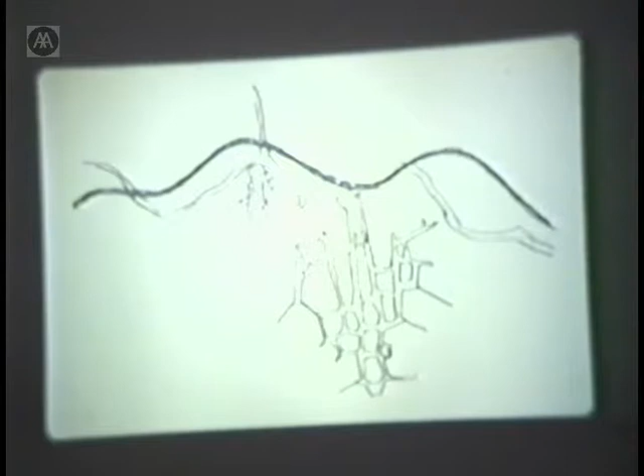The concept, one of a network in which the vehicular system was given a different geometry to the pedestrian system. There were three components: traffic system, pedestrian traffic net, pedestrian net, and the green space. They were locked together in a form of what we then called contra-geometries. That is, one geometry playing against another. And as you can see, the project envisaged a real regeneration of Berlin as the capital of Europe and the crossing point between East and West.

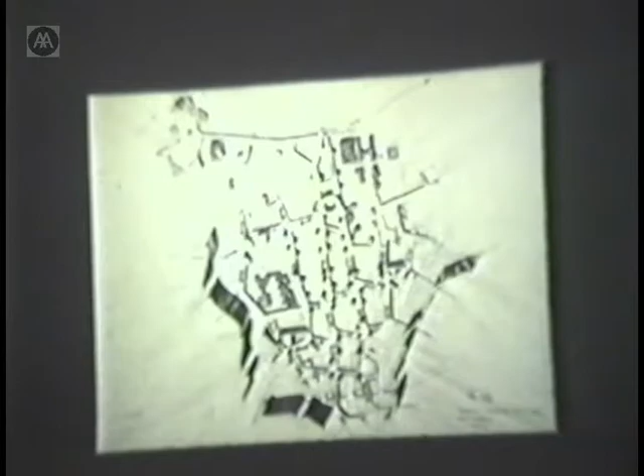The next period, the 60s, we had to face that the unification of Berlin was unlikely, and that we had to deal with half of a city, a half where the frontier made a shape for the western portion like the look of your hand, with the Mehringplatz at about this point. When the city was divided... can I walk about? No, I'll walk about, I'll leave the microphone.

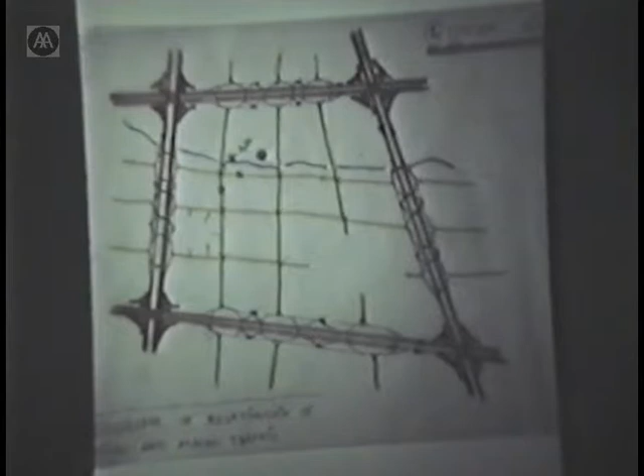The deepest, the longest thought-of project for the Berlin Hauptstadt was that of Hans Scharoun. And in his Hauptstadt, the grain of the city went from east to west. Once you accepted that a north-south axis was impossible because of the border running across it, the grain running with the Tiergarten seemed to be the obvious fabric for the city.

Therefore, the 60s, in accepting the splitting of the city as a permanent thing, with the permanent handling of an ever-increasing traffic load, our second project for the Mehringplatz looked back at Scharoun's Hauptstadt. Scharoun's Hauptstadt accepted the green-centered city and realized the horizontal east-to-west structuring potential of the Tiergarten.

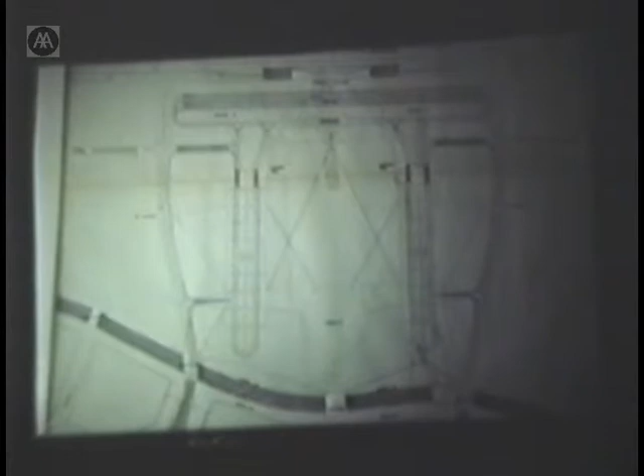Therefore, at the time of the Mehringplatz project, we accepted an idea of a linear system with things pendant on it. One of the things that was pendant on it was the development at the Mehringplatz. That is, it was no longer the end of an axis, but something hanging off a series of horizontal strings, one of a series of things hanging. So the distribution is at the top, the grain is running east-west.

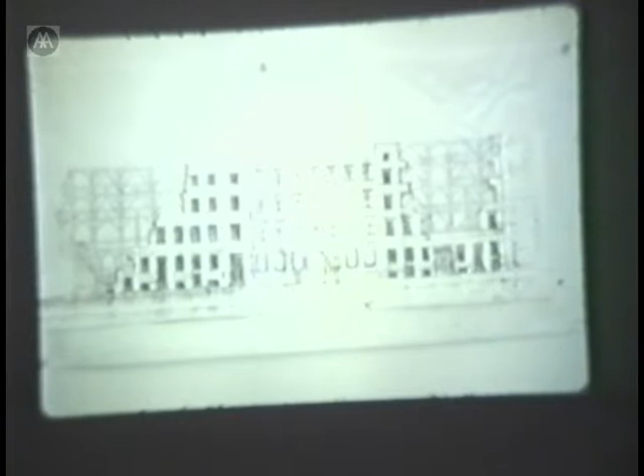In the 70s, the attitude that was generally accepted was to consolidate the existing fabric. Our studies in that decade were trying to make the existing half city more adherent.

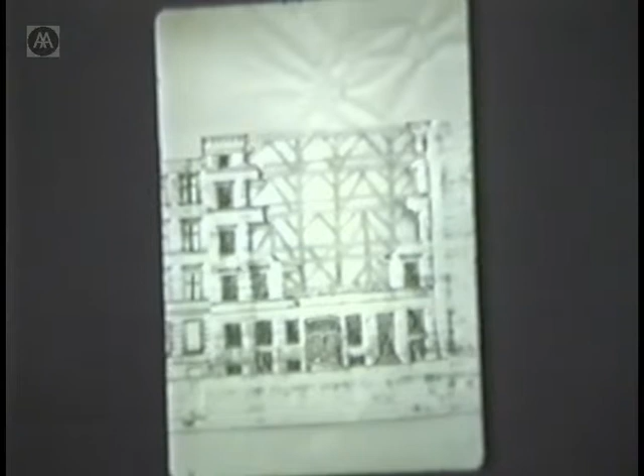In the Kreuzberg project, the keeping of the integrity of the city block and quietening the space behind it. Two projects for Kreuzberg, in '76 - can I have that off?

Well, that was '75. '76, another infill project on the Landwehr Canal. '77, a bridge over the Verbindungs Canal.

And in '80, with the collapse of the Congress Hall - how do I make it go again?

With the collapse of the Congress Hall, a series of projects organized by the Aedes Gallery for a monument to the collapse of a building. And we made a tree for the Berliner Bear to live in.

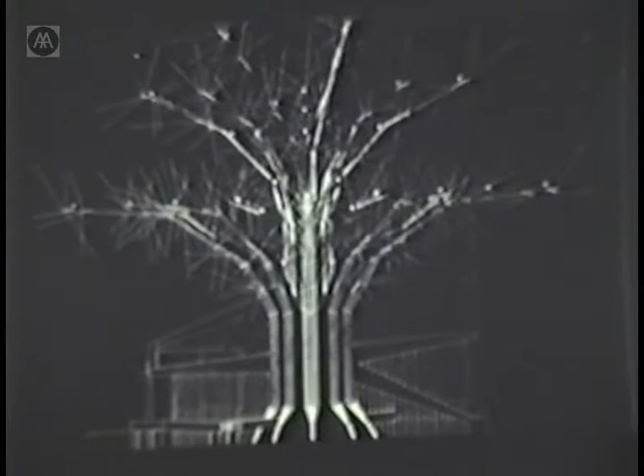Now at this point we begin to pick up connections with AA people. That drawing was made by Ira Fagan, who was an AA graduate.

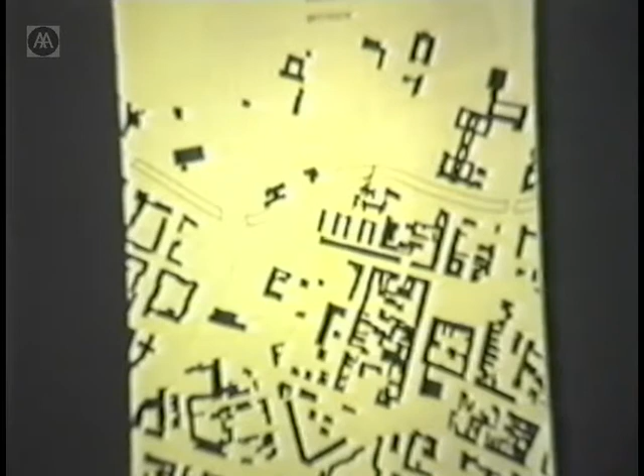In 1980 was the beginning of the IBA period, and we made a competition on the Lützowstrasse, still pursuing the idea of adherency within the conglomerate of the half of the city.

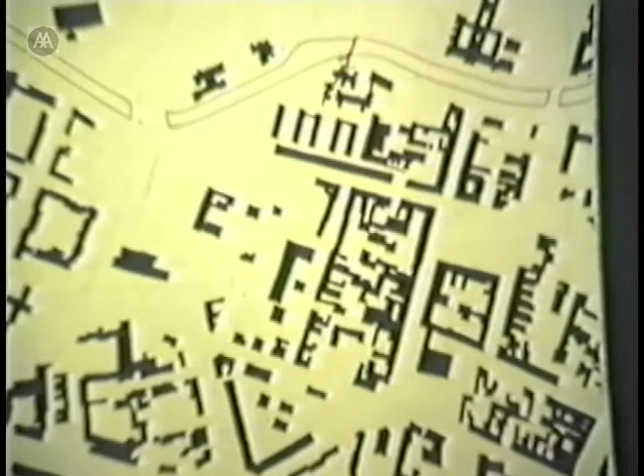But something completely new was entering, and I would have thought this was no longer a period of infill, but had already moved into the period where the green, the new contract with nature, began to fight through into an aesthetic.

So this project is one which responds to the climate, to a sun-accepting south face, an energy-conservant north face.

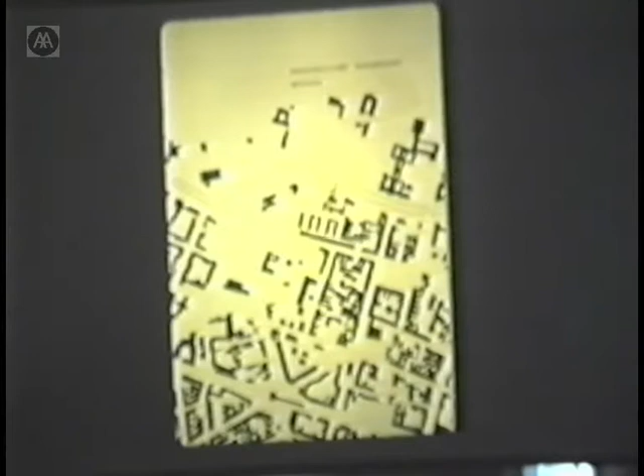It took as its model the summer tram of Berlin, where after Easter passed, the tram cars became white with white awnings, white curtains. And we wanted to make a building that when the summer came, it would change like the trams once changed.

So this picture captures, I think, the change in one's sensibility. We now wish to cohere with the periods of the year, the cycle of the year.

So that we've made a project in which it was obvious where the sun would come in and where the sun would be kept out, the north and the south. And this is the bit that's supposed to look like the tram car.

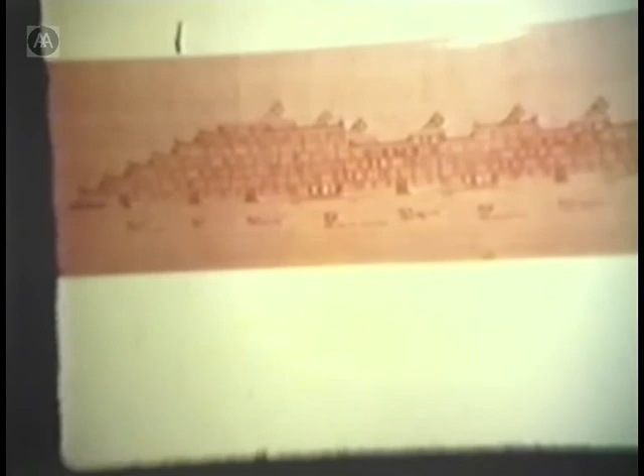It's more like a train picking up power at the top of the tram car. And with a plan which changes its density from the north side to the south side.

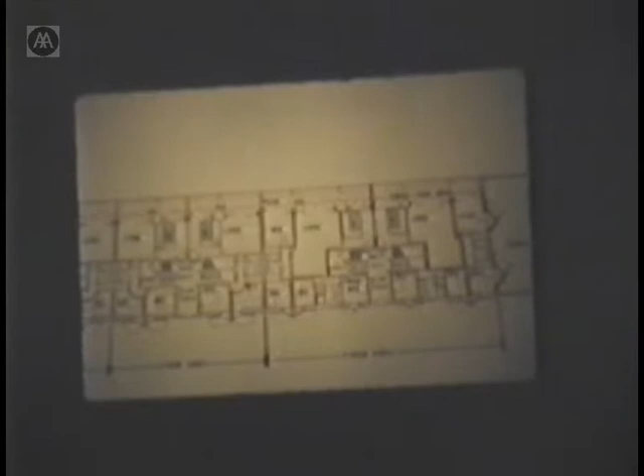And I can see that this, the organization of the plan to respond to aspect, is going to occupy the next 15 years. And you can see the thought that was given to the way it behaved in relation to its situation.

The same components from the main building are used in the subsidiary building. This is a youth club. And from the youth club, you can jump over the canal into the greener parts of the city. The building was used as a wall.

The wall built a territory. In the territory you had the garden buildings. I mean, it's a continuous theme.

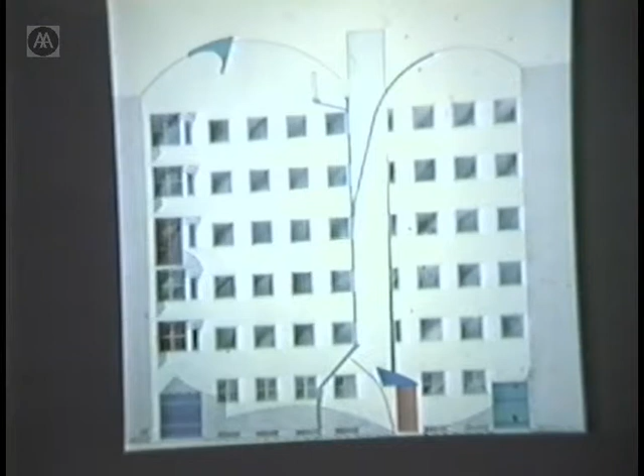And it so conveniently happened that this face, of what is basically a small piece of a side of a block, we are willy-nilly forced into sustaining this mythical block. I seem to remember seeing photographs of the old Lützowplatz, but actually it wasn't as totally integrated a block as it will be when it's been rebuilt—it was much more like Notting Hill Gate.

It was much more a piece of bourgeois Arcadia, with a lot of trees and lots of slightly funky corners. So it's not a question of replacing what is there, it's replacing again the mythology of Berlin, the city of completed blocks. But I digress slightly.

This is the east-facing side of our little building, sandwiched between others. Even in Berlin the sun rises in the east, and one wakes up and has one's bedroom, so it's reasonable to have the bedrooms and bathrooms facing the eastern, quieter side, while the living space picks up the sun as it turns round to the west and southwest.

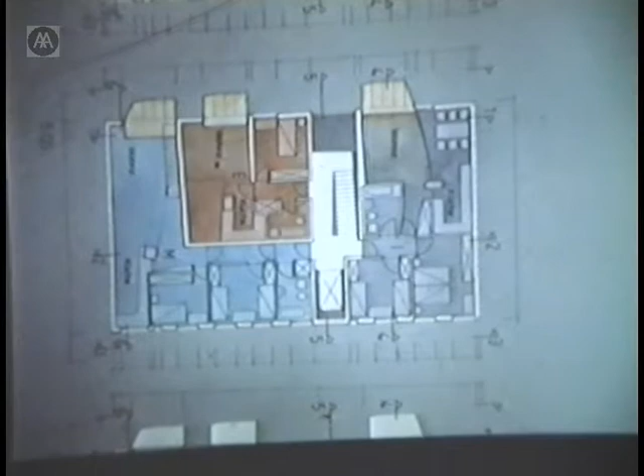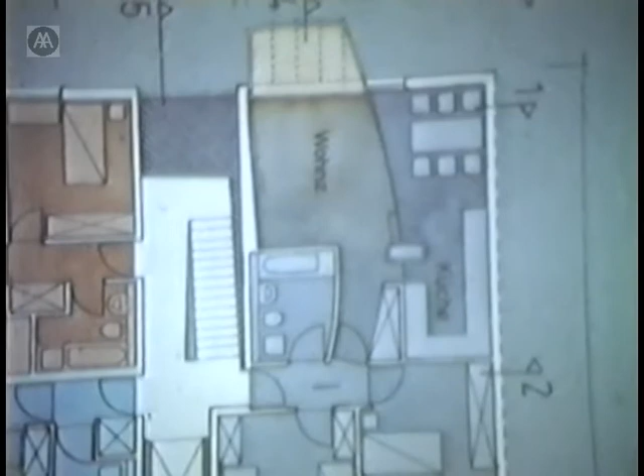We're told there is, or has been, a competition for the reconstitution of the Lützowplatz, a sort of town square, and for reducing the main traffic that currently runs past it. We can only hope for this, so we intend the living spaces to automatically be on the west side, the green side, the sunny side, facing out over the park.

And so it is reasonable to have two different kinds of skin following that orientation.

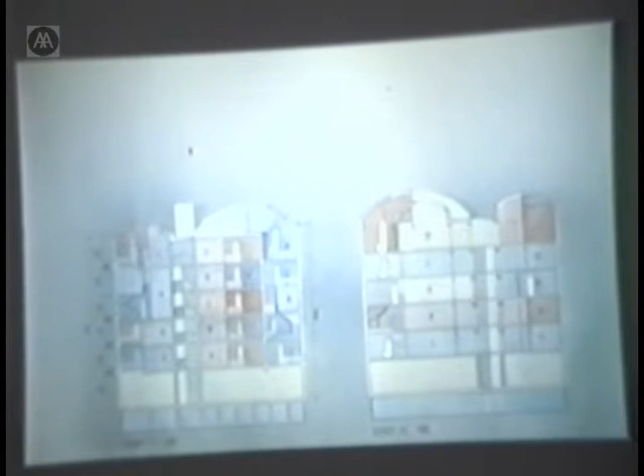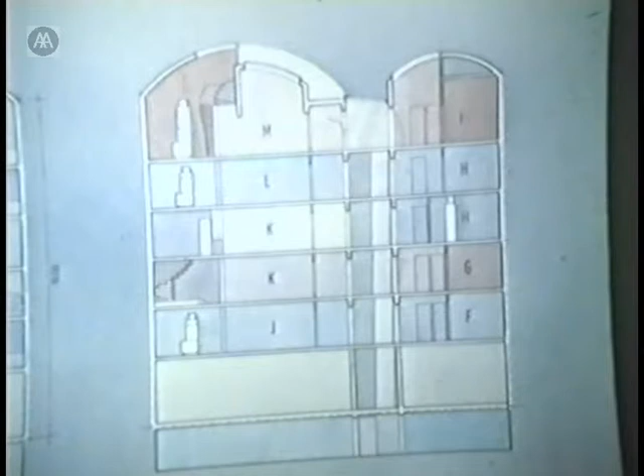I think the other thing I should mention is that both Christine and I have worked in offices building housing to the famous Parker Morris standards. I've noticed that compared with some of our neighbours, coming from this sort of penny-pinching English Parker Morris background, we're used to conversations like 'you'll have to move the partition two inches because that'll save so much money,' and 'the pram goes under the staircase' — all that sort of thing one sneers at on one hand, but is rather familiar with on the other.

And essentially coming from this tradition, we basically designed the building from the inside to the outside. We didn't make any drawings of either facade until we had got pretty near to the end of the design of the dwelling units.

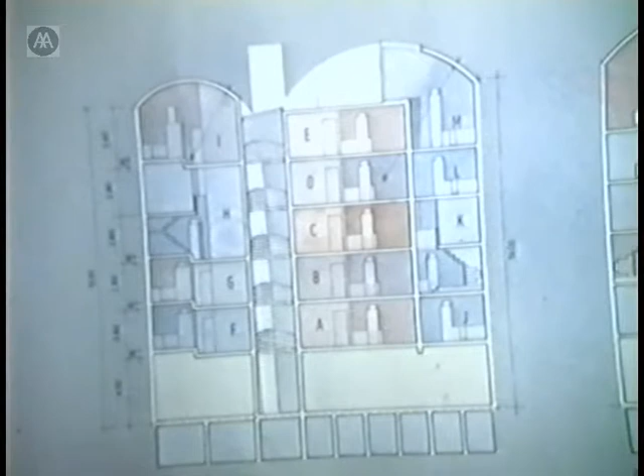We drew most of the many early arrangements of the building in section before we started really pinpointing the plans. I think that essentially comes from a tradition — perhaps you might say a 60s tradition, though Christine would contest that description — but it comes from a spatial and knitting design position, rather than, as we notice in many IBA housing pieces, where you perfect the facade and then stick some rooms behind it, so the reiteration of the facade becomes the primary thing.

I'm showing here a rather early version of the same project, before our hands were slapped and we were told not to do so many maisonettes, because we were really thinking about bringing light into the center of the building, knitting, giving some relief to the boxy quality that so much local authority housing has. We've even had boring discussions and battles over how many centimeters of height we can buy.

It's the problem of small flats — as a child I lived in a lot of small boxy flats, and I know how tedious they can be. So the planning was essentially three-dimensional, from the inside out, trying to get as many diagonal glimpses, as many beams of sun, and as many spooky corners as you could, without making every apartment different — trying to be rational by bringing load-bearing conditions down where needed without the whole thing jiggling around, making the technically more complex parts applied to the basic structure rather than carved out of it. We have, I think, 8 types of apartment in a block that only has 13 units anyway.

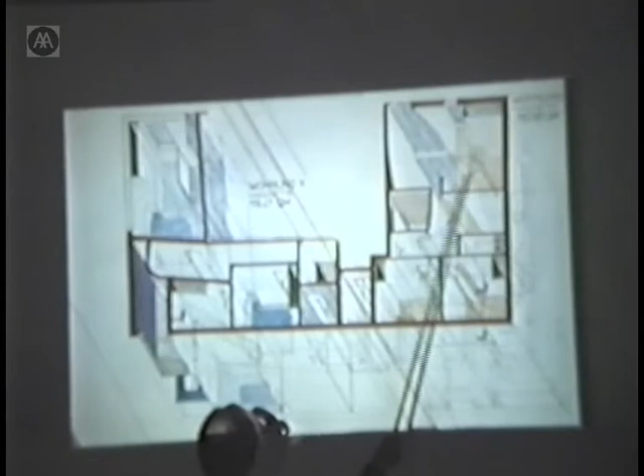A typical apartment is this one on the right, where you can see in this case a double-height space, an internal bathroom, and the bedroom onto the quiet back court.

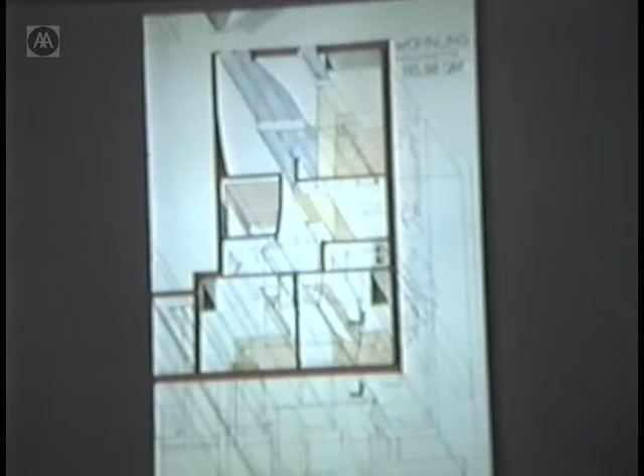You will notice the beginning of some internal pieces of architecture, which are the towers. These are very important and really stem from conversations that started with this thing made in Milan called His and Hers, something between the scale of a piece of furniture and the scale of a room—a notion started as a tradition by the Smithsons themselves, in projects such as the Appliance House, the House of the Future, and the notion that the appliance generates an internal architecture of pieces which take on their own continuity with the space.

You don't just make the box of the room and hope the furniture that comes in is all right, nor do you necessarily just fit up kitchens and bay windows and hope the rest of the interpretation is all right. What you do, if you can get away with it, is scatter the space with certain nodal elements.

I'll come back to that again. As we turn to the park facade, one sees this common space of the family, the double height spaces where they do exist, and the living room spaces bursting out and grinning at you by way of the winter gardens.

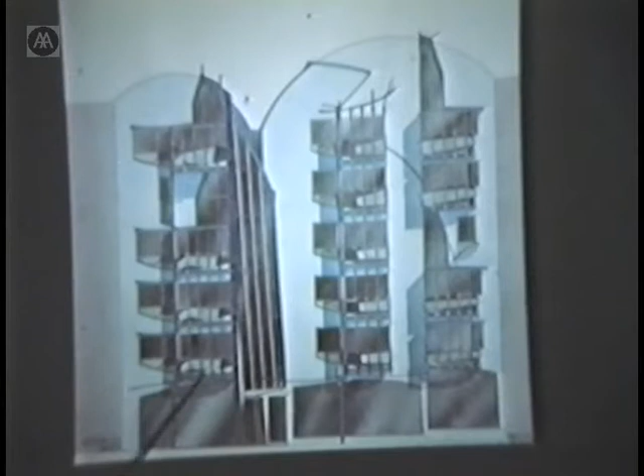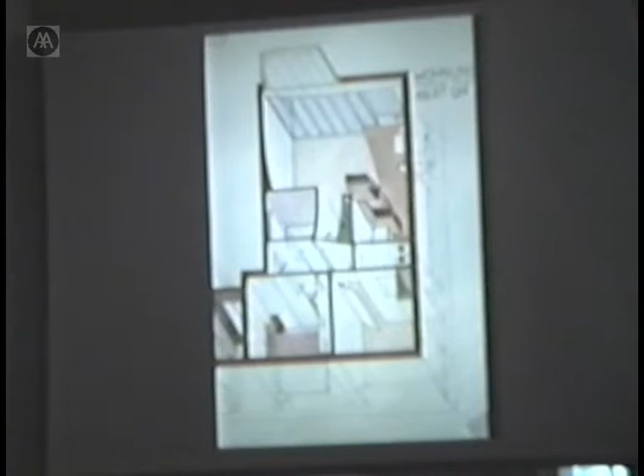These internal appliances then start to congregate around the kitchen area, and this is very much part of Christine's interest in kitchens and cooking and the development of kitchens—you have a kind of node point for the kitchen, but you don't have these tedious strips of cupboards that you hope the food activity will sort of infiltrate the space.

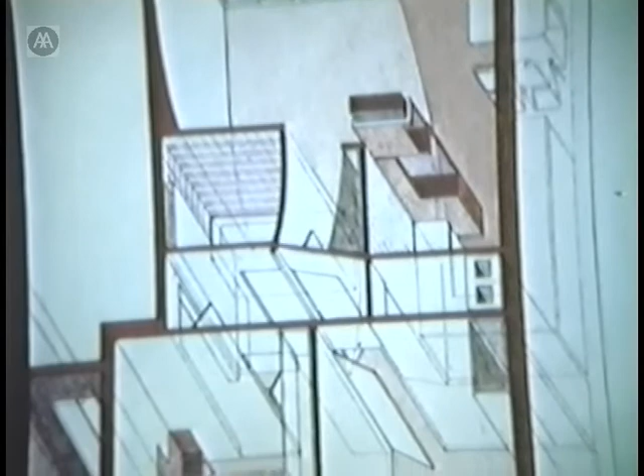Difficult to do with these tight floor-to-ceiling heights. So we then start playing other tricks by deliberately stepping the concrete slab floor by floor, just so one gets the impression of greater height without actually using any more volume.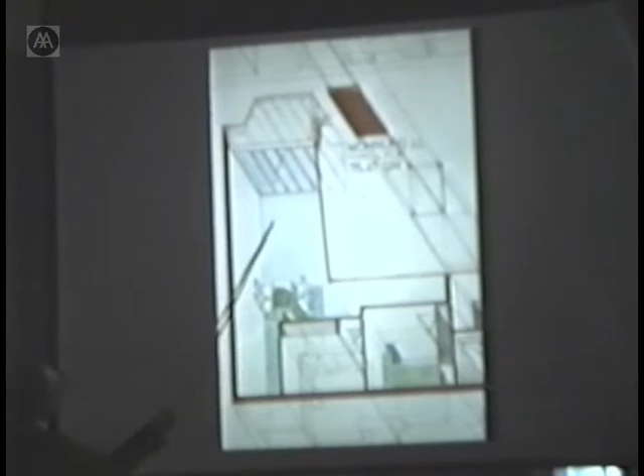On some of the apartments, one gets the full see-through conditions, so that the kitchen node tends to creep further towards the back of the building. This is the winter garden here, and I'm hoping there are a couple of slides coming up that feature winter gardens.

These slides were taken on my very first visit to Berlin about 15 years ago, where we were taken round the town by Eduardo Paolozzi, who's probably the ideal person to confront the place with first off. The thing that really stuck in my memory right from then was the relative exuberance, not only architecturally, but sometimes personally, when people used their balcony.

Here we have a bourgeois version. I think there's a... no. Oh, we jumped to...

Here's a tattier version in, I think, Kreuzberg, which, as you know, is a run-down part of Berlin, where suddenly the whole thing comes alive. Never mind the asbestos sheeting, but the whole life comes alive on the balcony.

It was useful that in the brief was the requirement that every apartment should have a winter garden, and these winter gardens, I think, are really where the English tradition of playing around on the windowsill and the Berlin tradition of playing around on the windowsill come together.

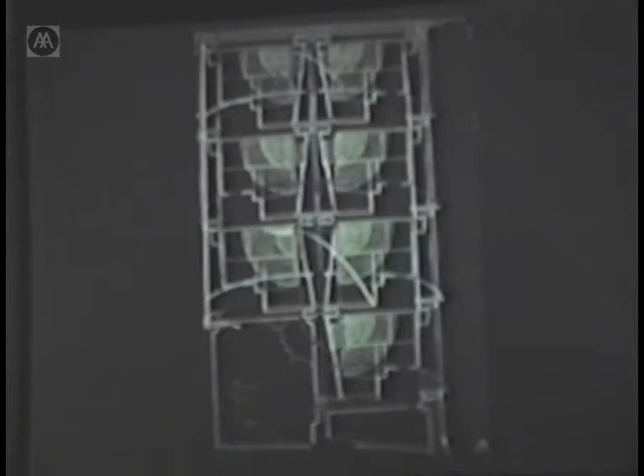One would be dishonest if one did not admit there were other projects that existed where some of the geometric games, if you like, had been tried out before. This was our Peak project, and there is also, of course, the strange bit of Berlin architecture, sometimes called Gothic, though I think it's actually something else, which one isn't really permitted to talk about.

It's not a favoured tradition in Berlin. There are other traditions much more favoured by the intellectuals, but nonetheless, they can't stop you noticing these things out of the corner of your eye.

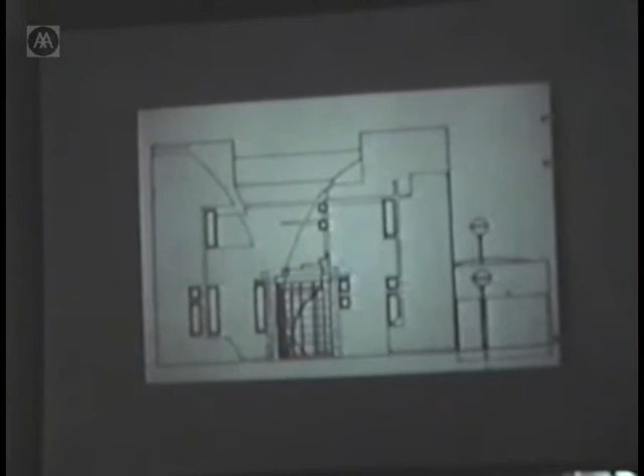There's also, of course, the Blue House, which was our solar house designed for another part of Germany, which, in a roundabout way, did sustain some of the thinking on the Lützowplatz. It too was facing north-south, and it too keeps a very private condition to the north and an exuberant condition to the south, though in this case some of the geometric pools, similar to our south facade in Berlin, occur here on the north facade.

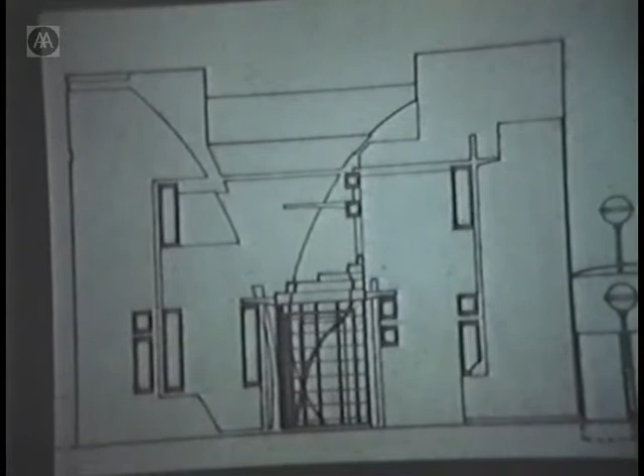Back to the axonometrics, and the fact that one then bursts also towards the top of the building.

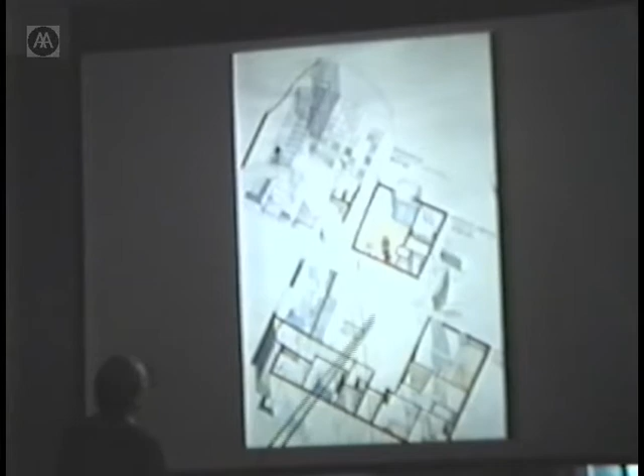The stack of very small apartments was something which was a requirement of the brief, that we provided 5 of these really fairly pokey, actually one-room apartments, but still trying to keep to the basic parti of the nucleated appliance towers and the winter garden. We wanted to cling on to that even in the smallest apartments.

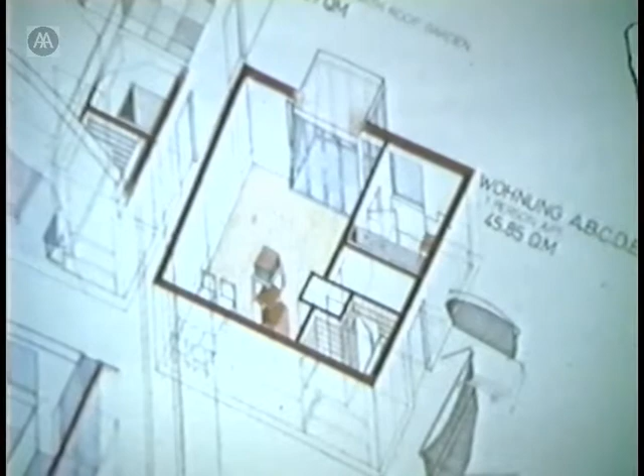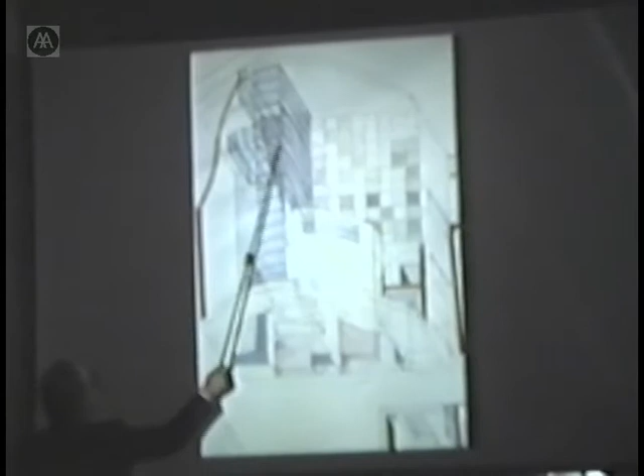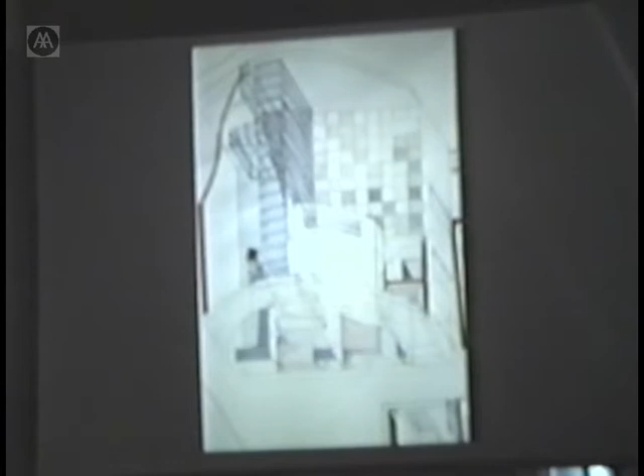Gradually, as the scheme opens up, one has a roof condition with something like a maisonette apartment, which becomes a studio using the roof itself. But actually, the generic plan remains the same, so it became an interesting play of how much variety we could get out of basically 3 plans: the left-hand side plan, the right-hand side plan, and the box room in the middle. That, as far as the development of the scheme, has really been the generic thing.

Upstairs you can see various versions of this facade as it has developed. Since, for instance, this morning I was working on the handrail details, I can tell you that it's developing by the hour at the moment, since we're under great pressure to finish the working drawings. You will have noted this as the drawing of the latest date.

Whilst in Lincoln, Nebraska, we were able to develop the bay window, and the bay window has become slightly more regularized. I think the rest of the building is continuing as was.

The greatest headache that we're facing now is word that the chosen contractor is one of the most penny-pinching in the business, and the report from all our friends there is that the worst thing is that we lose some of the nice bits, and I think this is something that faces all of us.

In processing through, one has heard various horror stories from the OMA group, for example, and just about everybody else, including Mathias Ungers, who has a marvelous story that on the building across the street that we don't like, the windows were intended to be about 30 centimeters larger, but the builders, because they had a job lot of windows, just put in what they had. That is pretty terrifying.

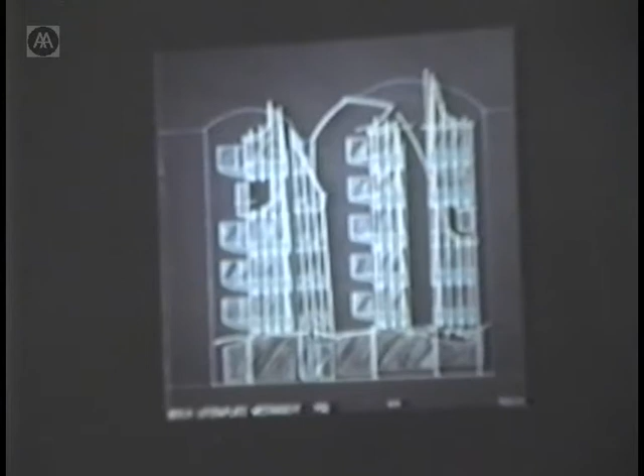And enjoying the deformation of the most expensive part of the building, which is the winter garden, hoping that it gets very mossy and very messy and full of funny trinkets that those old ladies put out there. Maybe that's being very English about it. I don't know. Maybe we'll discuss that later. Thank you.

I saw Rem hiding around the corner.

So our next speaker is Rem Koolhaas from OMA, and I think OMA brought back or reintroduced the axis Moscow, New York, when they showed their first designs. And I think so it's only natural that they finally did schemes for Berlin, which lays in the way of that.

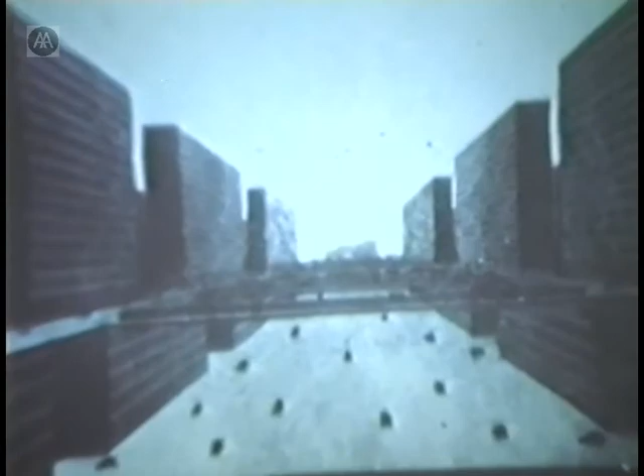As an exercise before our own project, we tried to investigate what relationship these projects had with history. It was very interesting to discover that Hilberseimer's project for the modern metropolis, dating from the 20s, was not a self-referential project, but was proposed for the heart of Berlin in obvious juxtaposition with one very beautiful neoclassical complex of churches. So Hilberseimer had been very conscious of placing his scheme exactly in the heart and most historically charged part of the city.

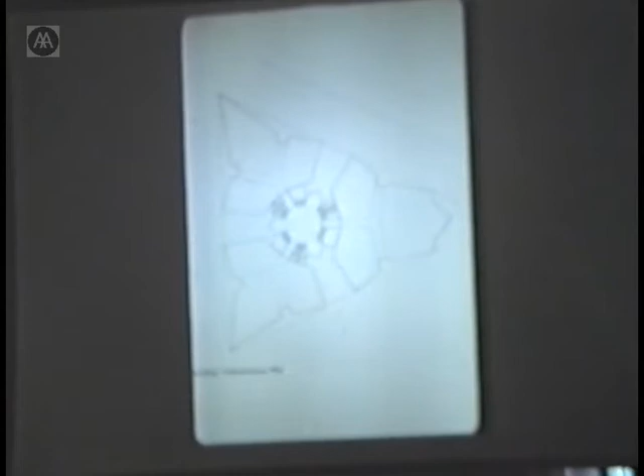It was even more interesting to discover that the famous triangular glass tower of Mies, usually presented in a very abstract way without showing any context, was actually a very contextual project. This is maybe clear in this famous presentation drawing, where you realize the juxtaposition of this scheme with Friedrichstrasse is very important to Mies, and that Friedrichstrasse is rendered as a very bleak, somber environment from which this glass crystal rises.

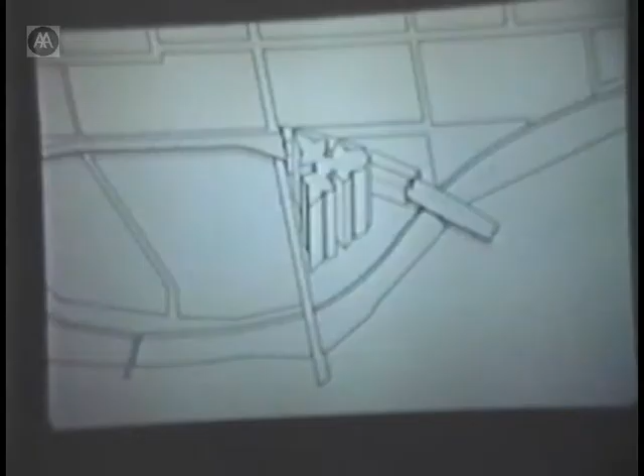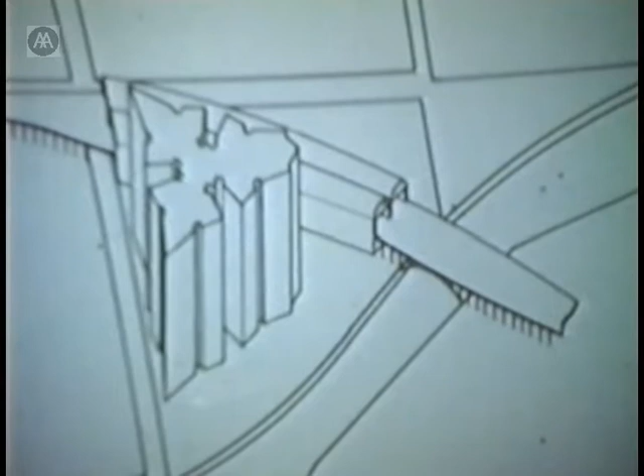What amazed me was, first, when I investigated where the project was actually planned, to discover it was at the end of Friedrichstrasse, the key street in Friedrichstadt, on a triangular residual site between the Friedrichstrasse station, the Spree, and the street. So in certain ways it seemed an eminently pragmatic proposal: since there was a triangular site left over in the neoclassical grid of Friedrichstadt, to put a triangular glass building there.

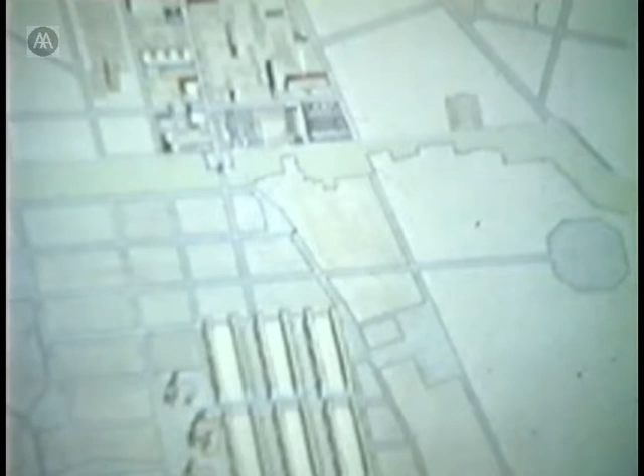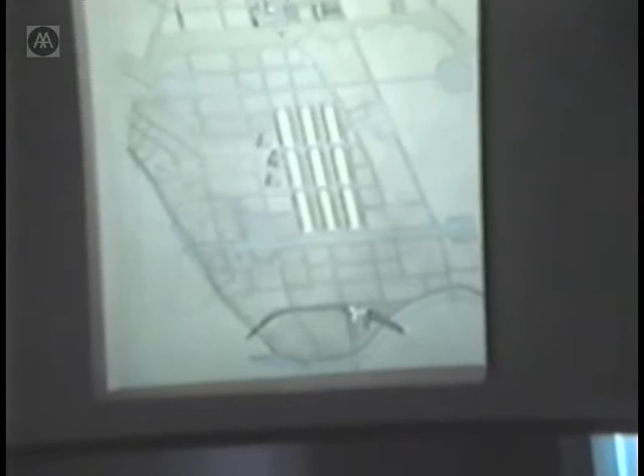But I think the real intention of Mies is more ambitious still, namely to explicitly take up a neoclassical theme already latent in the ideas of the planners of Friedrichstadt, because Friedrichstadt is an urban grid that culminates every time in a series of geometrical figures: a circle here, an octagon there, a square there. By producing this triangular tower, Mies was explicitly planting his scheme in this series of geometrical culminations, thereby making what was in fact a residue into an element in a neoclassical composition.

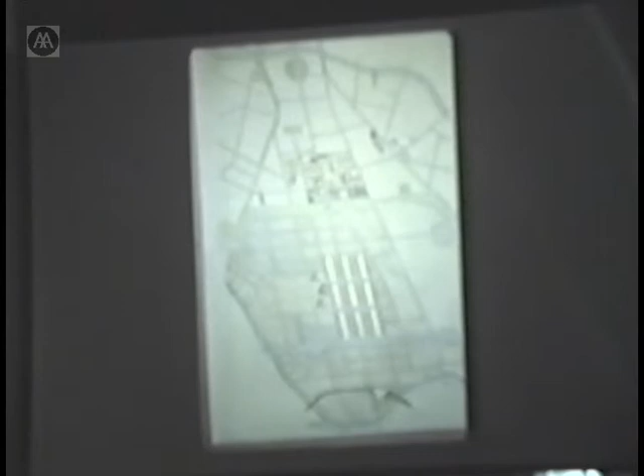And of course, by building it—not leaving it a plaza, but actually building it, and at a scale completely beyond and outside the neoclassical conception—he also broke the mold. I think that's one of the most interesting things about Mies, and by implication about the metropolitan architecture of the early moderns as developed in Berlin: on one hand, through simple scale alone, a definite break with the past; but on the other hand, through refinement of placement, refinement of materials, and simply refinement, a very subtle and strong relationship with the elements already in the city—a kind of superb ambiguity between continuity and rupture.

I think that was something very exciting to discover, and rather shocking, when I presented this scheme to the jury, which consisted of, among others, six eminent historians, that not a single historian knew the scheme was intended for this particular location, and therefore none knew of the logic that Mies presumably intended. When I discovered that in the presentation, it really confronted me with the incredibly thin ice on which all thinking architects are forced to skate at this moment.

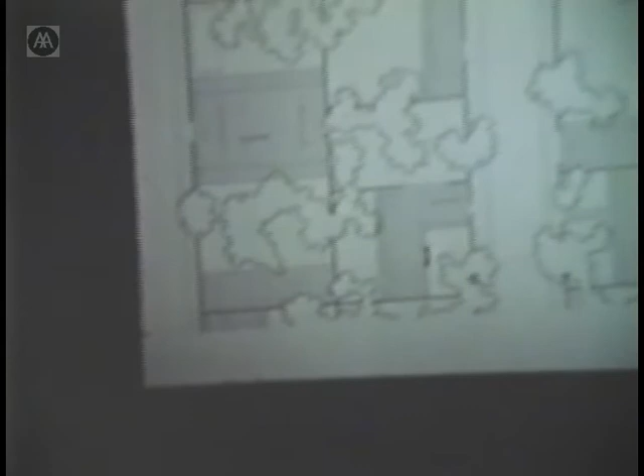Another extremely beautiful invention of the Berlin version of modernity has always been, to me, the courtyard house—also by Mies, but also by a whole series of other Berlin architects like Hilberseimer and others. What I've always found incredibly seductive and original about them is the simple discovery that within the extremely rigid framework of a courtyard, the architect can have complete freedom to pursue his own form of randomness. In this theoretical layout of Mies, you can see this ambiguity: on one hand, a form of house that is radically new, that doesn't tolerate repetition, where each house has the ambition to be an invention; but at the same time an accumulation of these houses that is eminently historical, with which you can build the city exactly as you could build Pompeii.

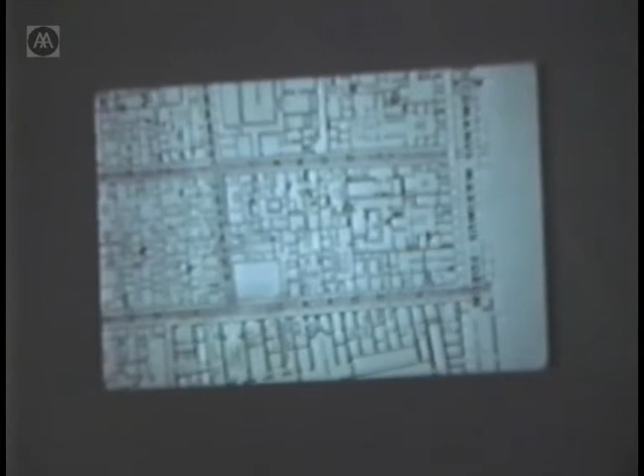I think this richness of being both radically new and traditional is maybe a Berlin tradition, and it's something very exciting about this period of work.

Anyway, the scheme I will show was for a four-block area in Friedrichstadt. You recognize the grid—here is the circle. It was in a very highly charged area because it had a length of 400 meters along the Berlin Wall. It was four blocks across, at an intersection of Friedrichstrasse and Kochstrasse. The four blocks were this one, a small one, and a very long one.

The blocks themselves were typically Berlin, which is to say some remnants of the past, some remnants of the 19th century city, a lot of 50s and 60s interventions that didn't take into account any historical evidence, that were usually not on the street and radically dissociated from the existing context, plus some 70s buildings that tried to be more polite and were already beginning to feel the pull of the historical city as it was then being discovered.

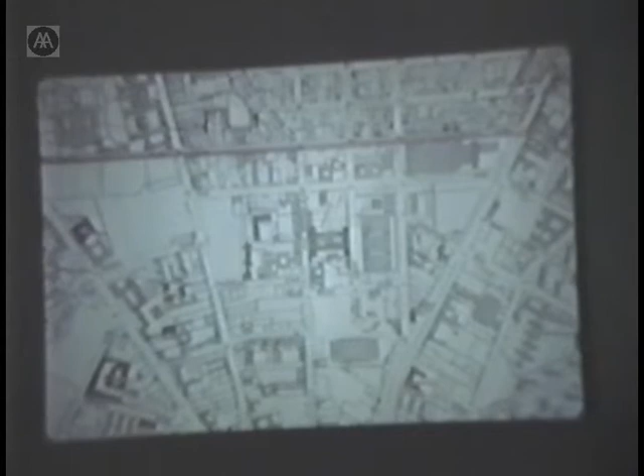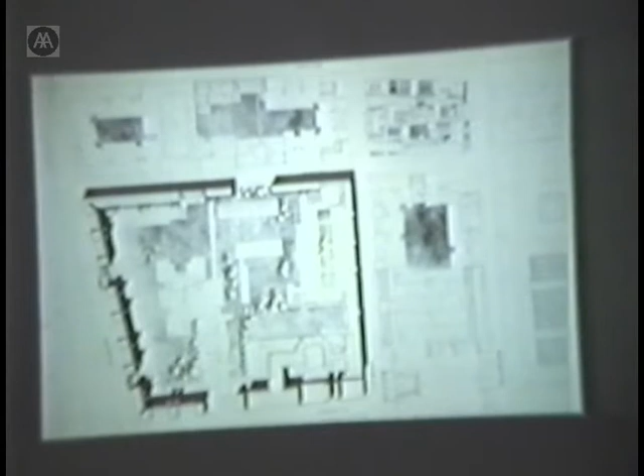The scheme dates from 1981-82, a period in which it was almost completely predictable that architects would simply take the blocks and repair them, in quotes, by reimagining or reconfiguring the historical grid of the city. A scheme like this one by Aldo Rossi was interchangeable with almost 80% of all the other entrants, except in style and look, also within the puritanical framework and predictable insistence of IBA that part of Berlin should, as much as possible, become as it had been in a kind of mythological past. It was clear that this kind of proposal was to be expected.

At the same time, I had already been very interested in the years before in Berlin, an interest stimulated strongly through collaboration with the German architect Mathias Ungers. Two years before the start of this competition, we were involved in a kind of theoretical proposal for Berlin that we interpreted as a kind of anti-IBA, or an ironical commentary on IBA. Because as IBA was preparing to repair the city, we wanted to ask some very provocative or obnoxious questions, where we said it's very ironical—Berlin is a very interesting situation for several reasons.

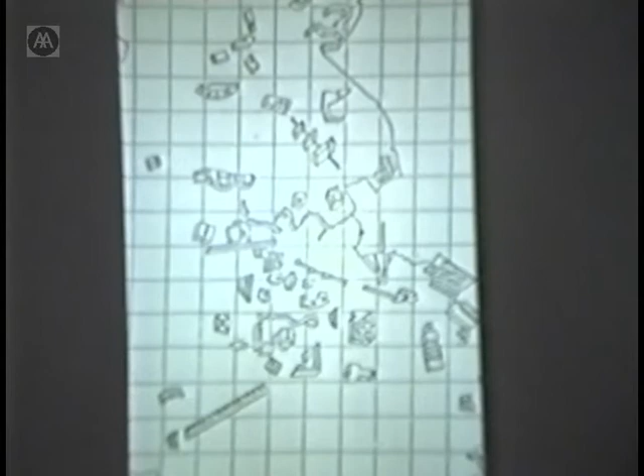One of them is that for political reasons, the territory of the city is given. Berlin is one of the few cities that cannot shrink and cannot extend. Ever since the construction of the wall, there's been a second interesting phenomenon: the city, from a population of around 4 million people, declined in a fairly continuous downward curve to something like 2 million.

So let's say over a period of 20 years, half of the original population of the city somehow had to maintain and support the existing city that in itself had remained the same in size. So we asked the question: isn't it very strange to use exactly this city as an example for the reconstruction of the European city? This city, through the decline of its population, theoretically doesn't really demand to be repaired or demand more physical substance or more architecture. What it actually demands is a concept of how fewer people can inhabit the same territory and maintain some kind of urbanity or urban life.

So in our proposal, we made a fairly radical and irresponsible step where we said the city of Berlin consists of a series of very beautiful fragments. They're either beautiful for architectural reasons, or because of the kind of life that exists in a particular enclave, or for many different reasons. So what we do, instead of repairing the city as a whole or declaring the city as a whole a museum, is identify a series of fragments that deserve to remain forever, to be preserved and even reinforced and intensified.

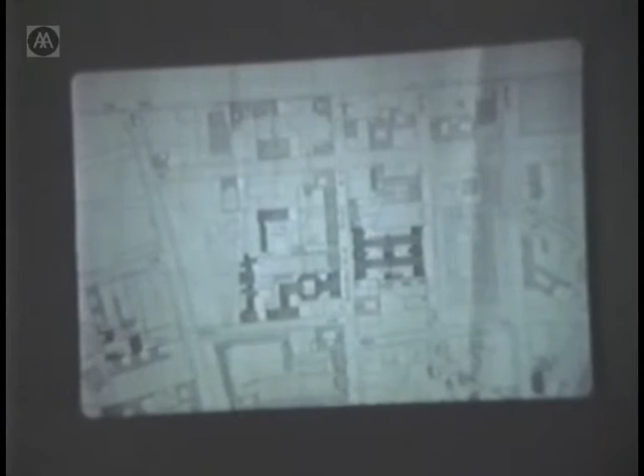So instead of repair, it was a competition organized such that each block had 5 architects, a total of 20 architects involved, and all of them had to first propose solutions for the 4 blocks and then concentrate on one block in particular. That also shows something about the incredible casualness with which architectural production is now treated — to invite 20 geniuses to make proposals that will surely never be realized.

But anyway, the block that we had to do in detail was this one — ferociously interesting and difficult. This is Checkpoint Charlie, the famous transition from west to east, with a length of 300 meters along the Berlin Wall. This was the northern edge of the site.

And of course, the first day we were walking around there with this group of architects, everybody was completely dutifully horrified, and extremely determined not to fall victim to this gloominess, to make proposals that would reintroduce vitality in this area.

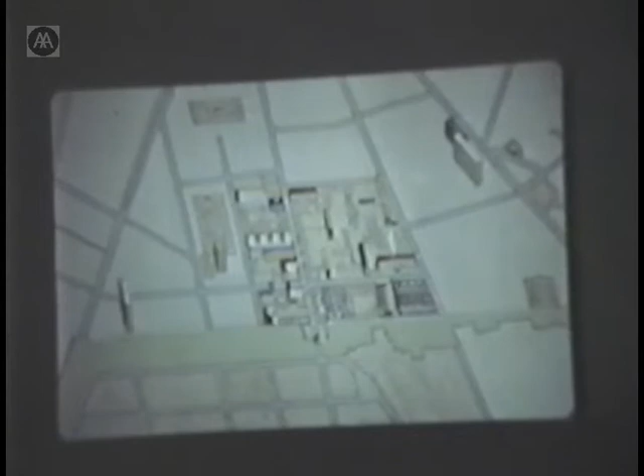And what the scheme consists of will not be very surprising. Basically, for the main block, the big block that Aldo Rossi won, I proposed that the only way to create coherence in what was inevitably a chaos of very heterogeneous elements was to find a retroactive concept for the chaos, and simply reinforce it by making every fragment part of a seeming composition of fragments, of earlier fragments.

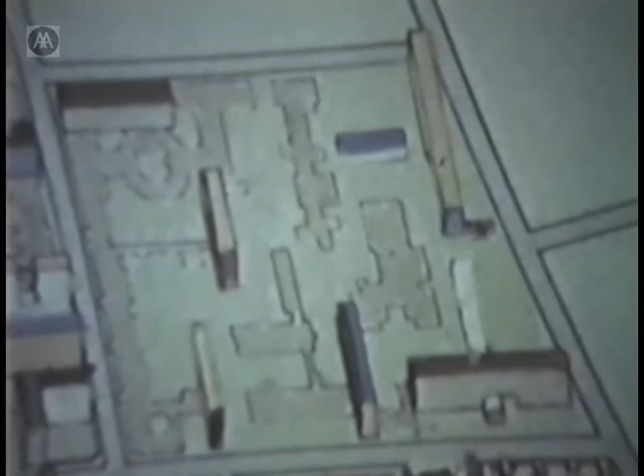What we proposed to do on these blocks was simply to cover all those vacant areas with carpet-type patio housing in the Miesian tradition, but also in the tradition of all those miniature elements that were already there. So the scheme was in an aggressive way both utopian and non-utopian.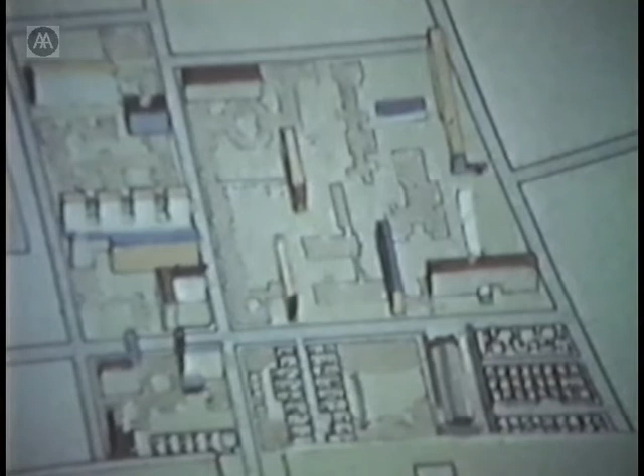Utopian in the sense that it resisted the preference of IBA, and anti-utopian in that it simply accepted all the conditions that were there and built buildings where they could be built, with no other pretensions than to complete the site as a whole.

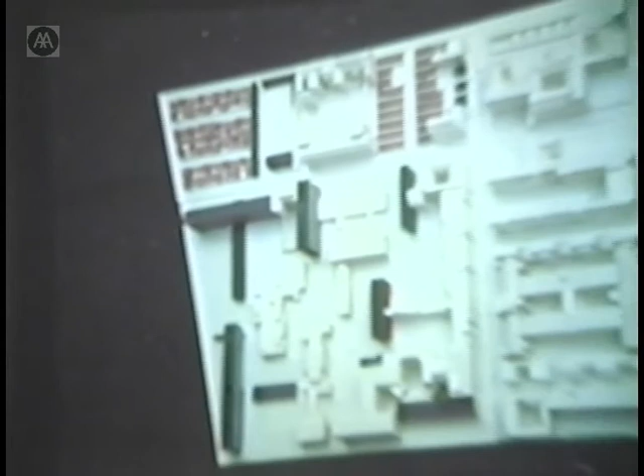So here again you see the composition for the big block, and here these villas built on those areas that were available, with the main gap at Checkpoint Charlie between two superb 19th century villas filled with one pavilion for the police, one for the customs, and one for the American army.

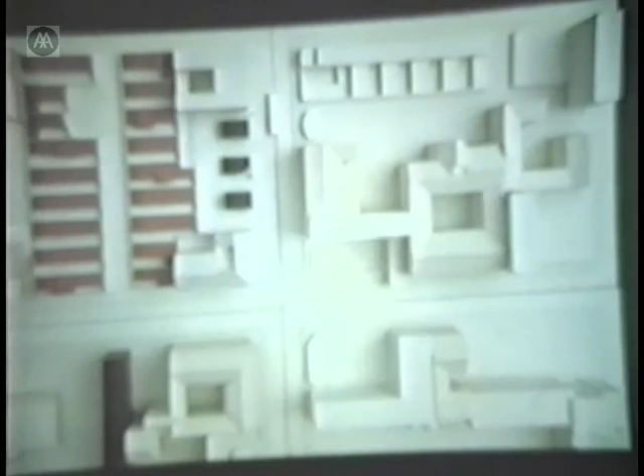Here an overall view of the scheme. Here the situation at Checkpoint Charlie between the two villas, and a carpet of incredibly luxurious houses there.

I mean, it was supposed to be social housing. My argument was that it was extremely unfair to put poor people on the wall in high-rise or relative high-rise apartments, that it was much more logical to use these vacant sites and create incredibly luxurious worlds there that were, through the fact that they were patio houses, excluded from the outside world.

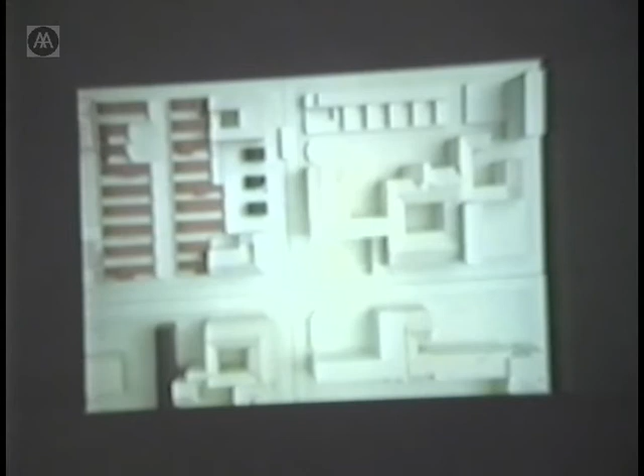It is a scheme on which I worked with Stefano de Martino mostly, and we were so obsessed at that point that every single apartment or villa had a completely different plan, different story, different ideology, and different possibilities.

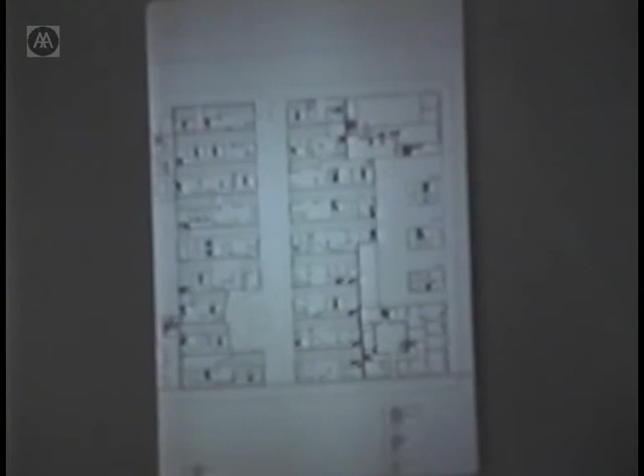And I still think it is one of our most interesting schemes in the brutality with which it accepts conditions, and at the same time the ability in which, within those extremely crude conditions, it finds some kind of idyllic world.

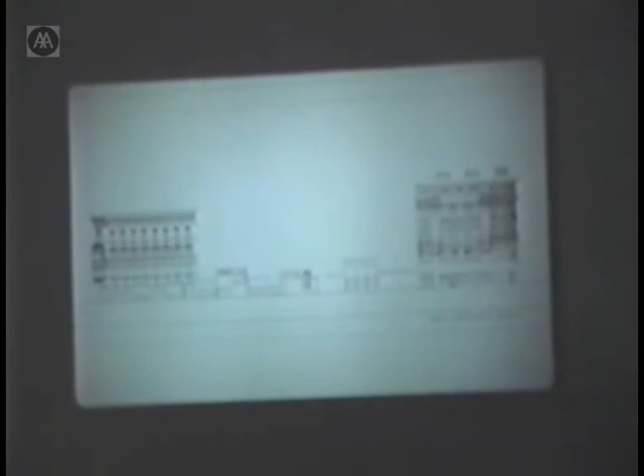Sorry for the mirror image. This was the face of Checkpoint Charlie, where you see the very American kind of architecture: one for the US Army, one for the customs, and one for the police.

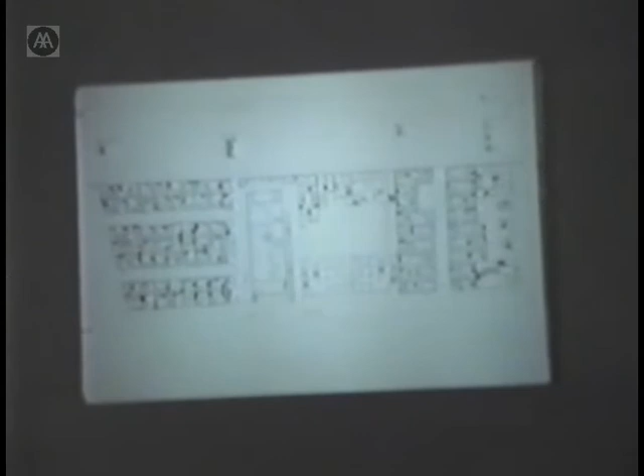So that's how we dealt with this gap, and here in a way we dealt with it in the same way, except there was a slight variation, namely that where this was simply a flat carpet without much three-dimensional articulation, simply because there were high-rise buildings here and here.

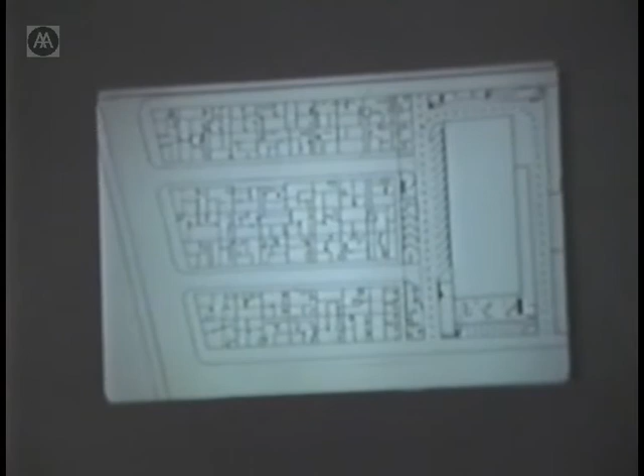But here we had an enormous flat site in an area that didn't have any major buildings. So there we felt it was maybe responsible to have buildings that consist of 2 floors, with this the ground floor, and this a close-up of the ground floor, and this the second floor.

Here you see a drawing of that corner, which is built up, let's say, showing the plan of the first floor and the second floor.

I'm tempted to leave these drawings for a very long time, simply because I still think they're almost irresponsibly beautiful, and also for their amazing ability to incorporate even the Berlin Wall, and to contaminate in a positive sense even the Berlin Wall. You can imagine the shock that the project gave when I presented it.

All the other entrants had made schemes that were simply perimeter blocks, even along the Berlin Wall, with very nice drawings of how the sun would penetrate the attic. There were drawings where the kitchen facing the Berlin Wall showed proving there would be very nice living spaces that had a view that was, of course, extremely horrible.

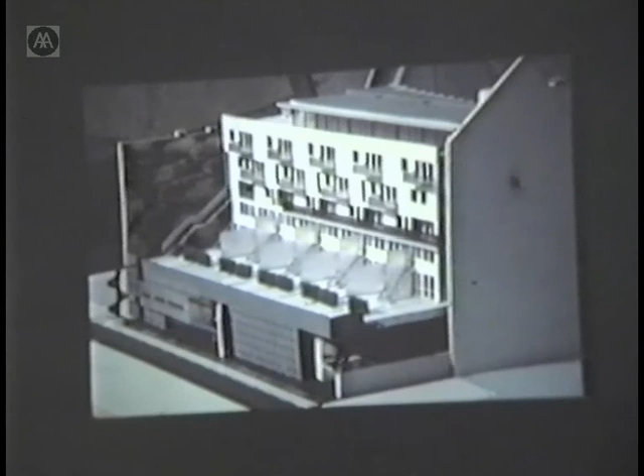This is the back, which explains more of the building. Again, you see the socle of the building, which is devoted to the American Army. Then the platform, gardens, and duplexes that have direct access to the gardens.

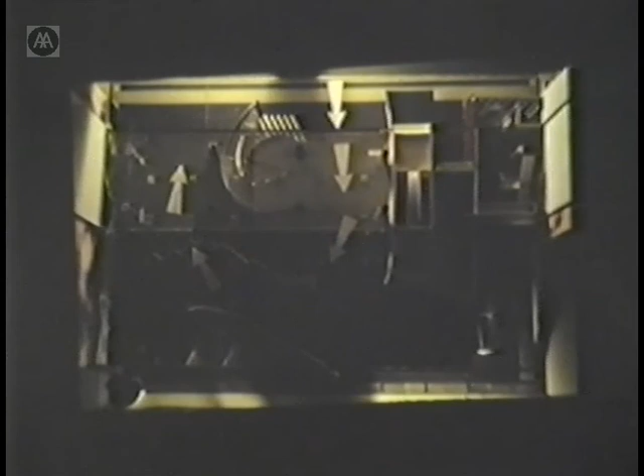And so I want to end on this picture, which I think gives a good impression of a series of projects over 6 years, and the final result of our work with IBA in Checkpoint Charlie.